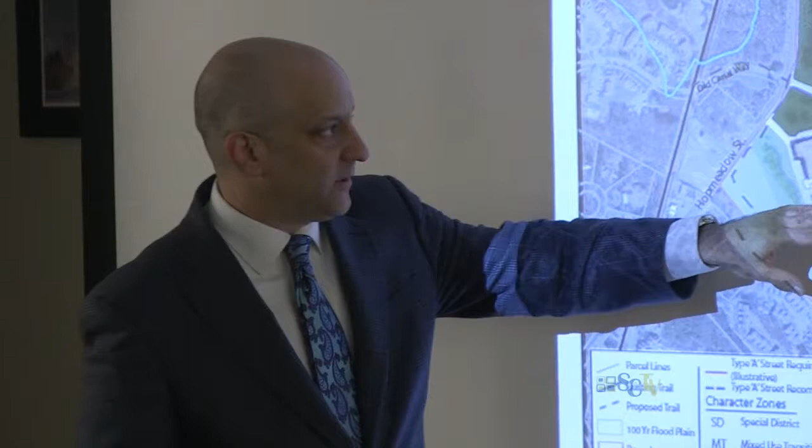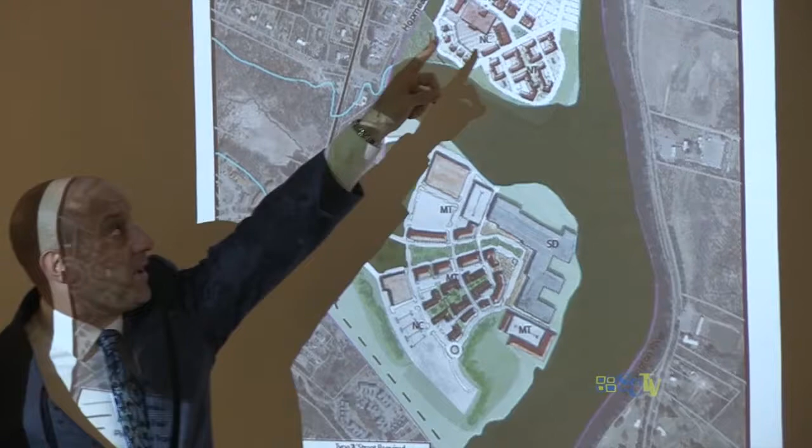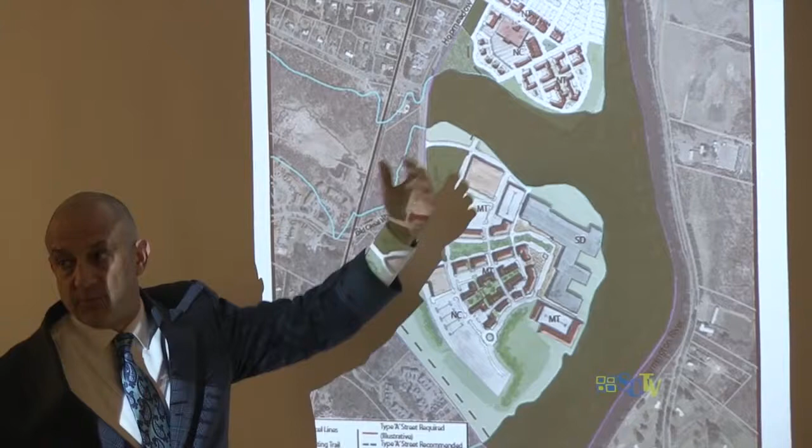Whether we're talking about infill development within the parking area around the office building, as we discussed, there could be multiple different things in terms of some specialized retail and maybe some residential, and maybe, for example, on the 40 acres, a retirement or continuing life cycle care environment, assisted living, retirement, market rate housing - let's say a 30 or 40,000 square foot specialty retail store with some specialty retail and restaurants where you actually have a neighborhood that could support and complement the reuse of this building. Well, this concept is based on several things that we considered in terms of a likely outcome.

So whether a purchaser likes what we've already done in the charrette, the odds of that are probably not going to be exactly aligned, but hopefully it's influential because we've done real market analysis. We've received great feedback from the development community in the area, and frankly, we have community buy-in to the point that the vision that's emerged makes sense.

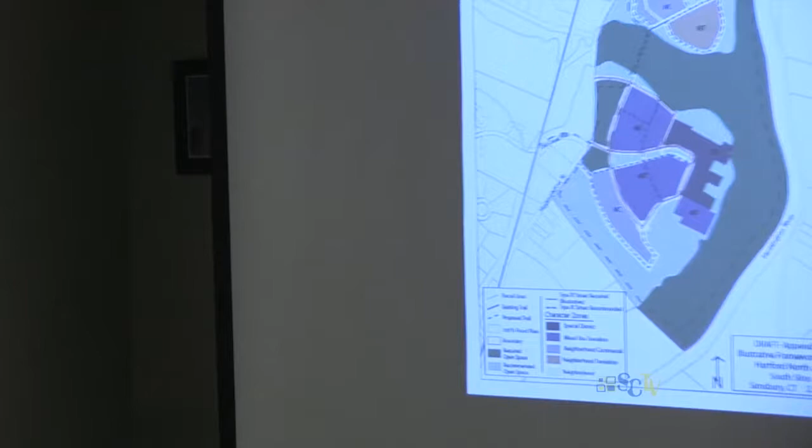In the next step, we would then ask the applicant to put together a master site development plan, and in order to do that, you would have to create a framework plan. So what we're recommending is that we attach to the code for adoption by the zoning board, the zoning commission, illustrative framework plans.

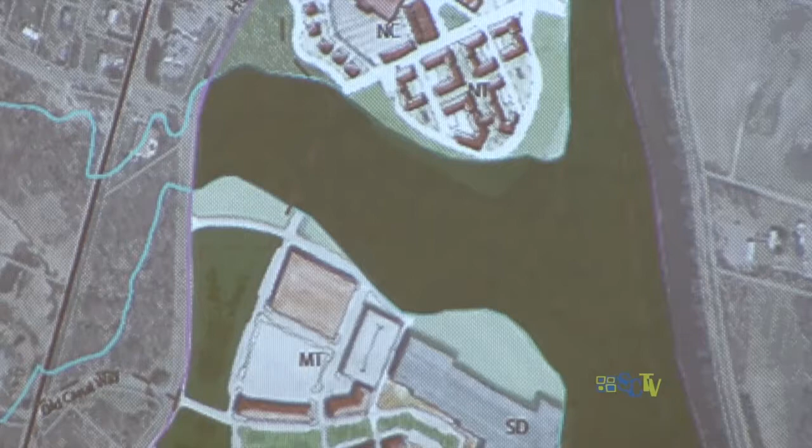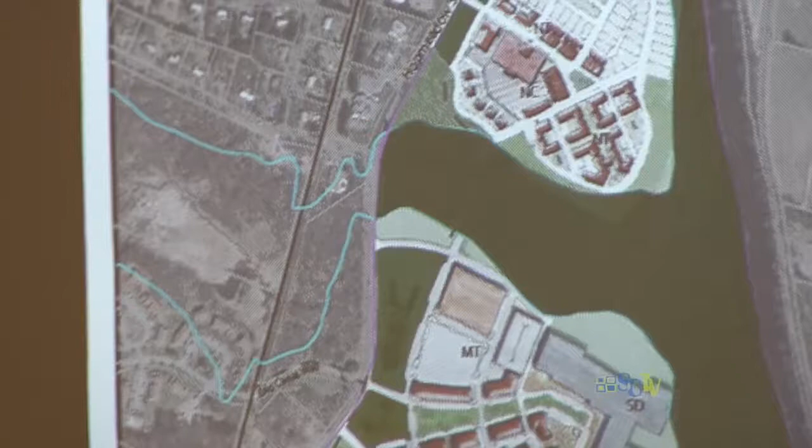But we don't actually establish the framework plan, because it's too presumptuous for us to establish a street network, the various character zones that reflect a specific concept. We want to give guidance so that when you come in with your idea of what the development should be, both for adaptive reuse and a different utilization of the parking and some greenfield development on the 40 acres, you have to look at the code itself and make a decision on what you think the framework plan should be, and then ultimately the detail and the master site development plan, which would represent the aggregation of the design tools within the code.

So it is a form-based code where we are actually looking at how the buildings relate to each other, how the design of the public frontages of the streets relates to the private frontages of buildings down the streets.

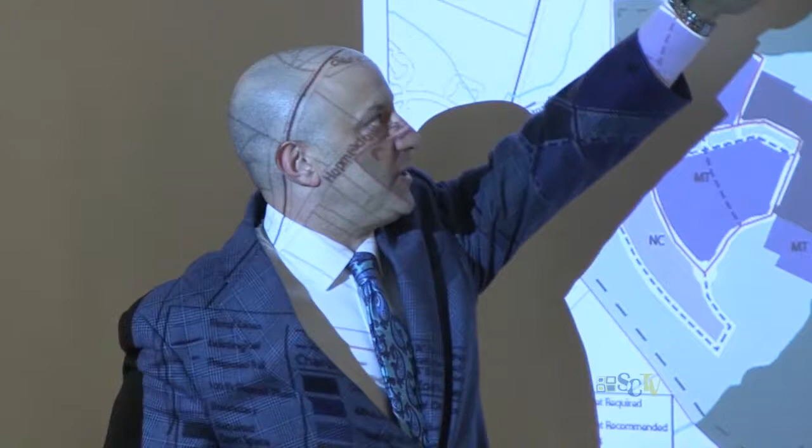But we're allowing that with a wide variety of uses. Now, the uses on the office property are going to be still more tilted towards industrial plus mixed-use residential office retail. The uses we worked through in our market analysis and the community process over here, of course, would not be industrial.

They'd be more community-based office retail residential. So I just wanted to reinforce that what we're doing is setting up the requirement for the applicant to come in and establish a framework, but these are illustrative. We are not actually coming up with our own framework, unlike what you did for the town center.

Because in the town center, you already have established patterns, historical development patterns. You have multiple owners. So the point of the town center process was to get the owners together and agree on how they relate to each other.

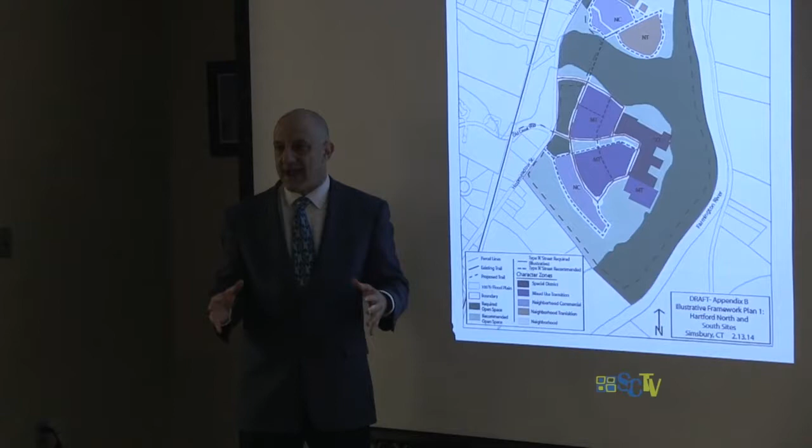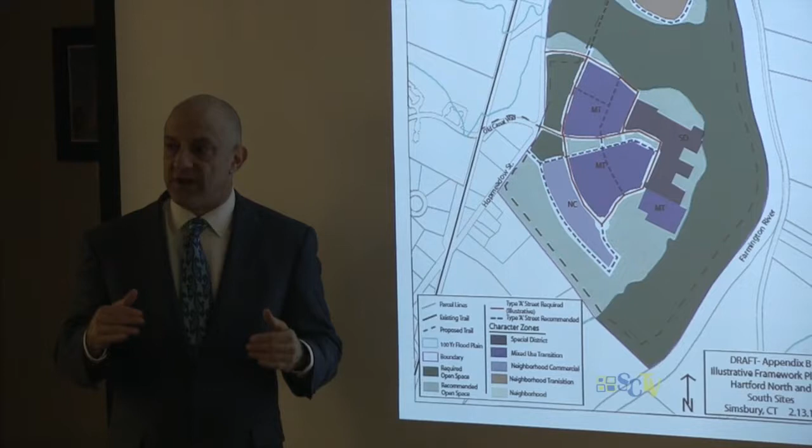But this project probably will have 3 or 4 specialized vertical developers under the umbrella of a master developer. And until we have that table set with participants who understand both what they think the market will bear and what they think the community vision needs to be, and frankly what they need to generate in terms of yield long-term in terms of rents and sales per square foot to back into a sales price, then I think we would be cutting off early some creative opportunities down the line.

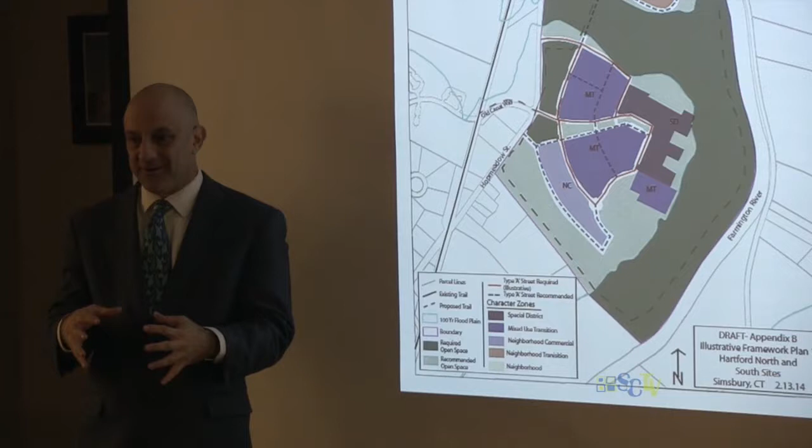So that's the balance. There's a lot of prescription in the design tools in the document, but we're not putting them together. We're asking the applicant, the purchaser, the developer to do that. And I think that's very unique.

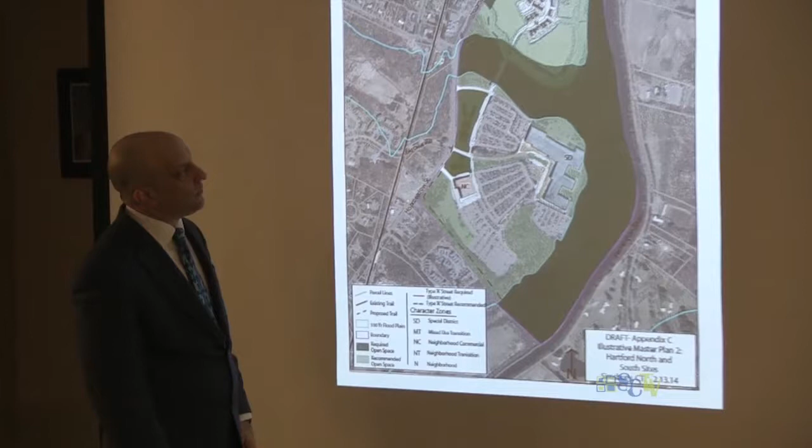So here's another one of the other illustrative plans where we had more of a conservation design, with a lower impact on the 40 acres with some potential farmland preservation, and a fundamental adaptive reuse of the property, maybe a multi-tenant use. We talked about some interesting light industrial strategies within the building, preserving the data center and maybe having a local brewery facility. There were a lot of different options.

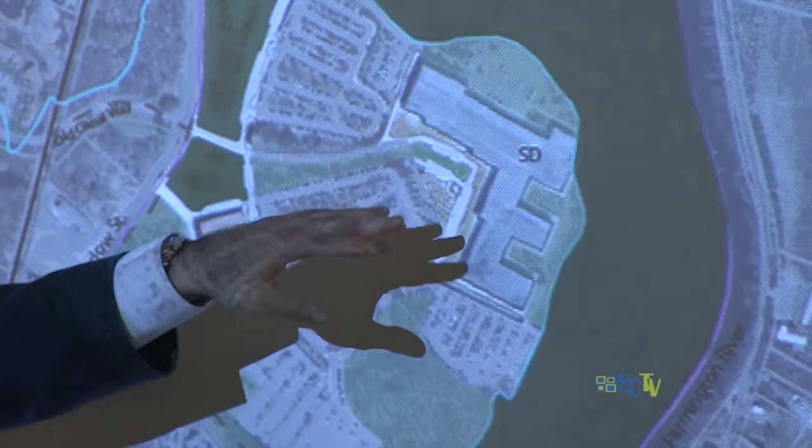I think, John, you're still kind of getting feedback that the single tenant strategy is going to be tough. So the other thing we've done in structuring this ordinance is making it easy to break the building up into multiple tenants, or if it made sense, to use less than the entire building. And I know there are certain components that would still have to be kept in place in terms of the physical plant, but maybe one wing of the building is no longer needed and part of the building is demised.

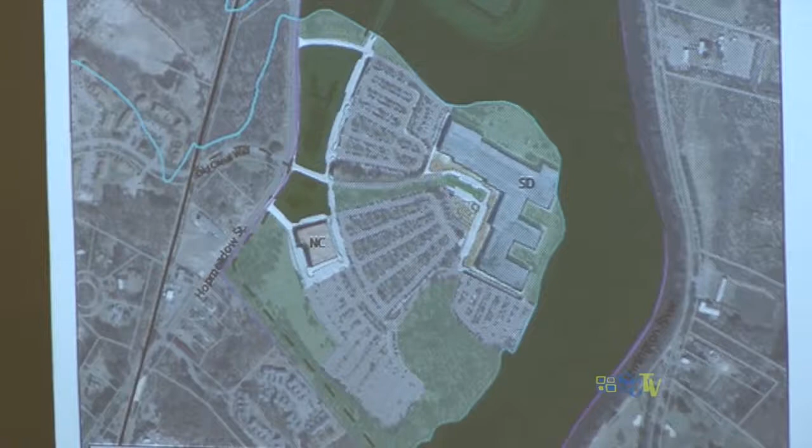The point is we won't know that, and the tool we've reflected in the document, I think, creates maximum flexibility to do that, but still represents a strong vision of what should be done with the site.

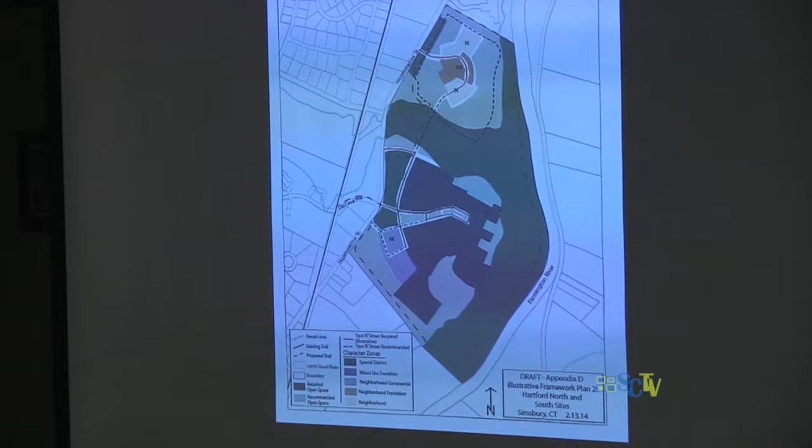Here's an illustrative example of another framework plan that would set up the final master site development plan required in detail in the document, in terms of parking and how the uses relate. We did not do an illustrative master site development plan because that's taking the document all the way through its entire required steps of putting all the tools together.

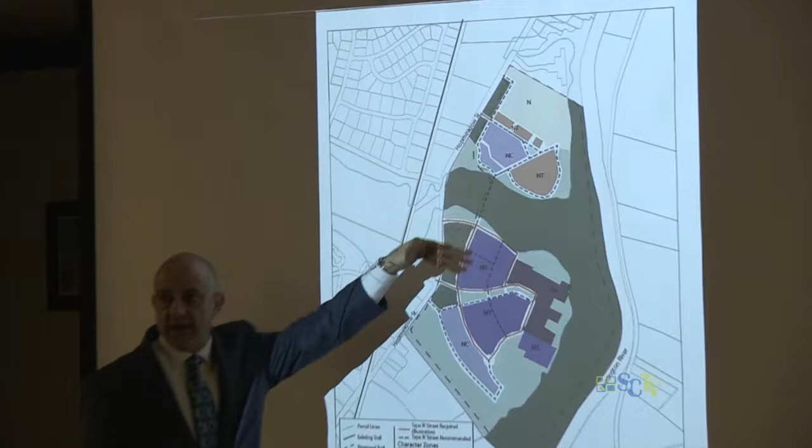Frankly, that's unnecessary. But we wanted to give enough guidance that anybody who purchases the property and uses the tool would have to go through a conceptual planning process, develop the framework, understanding the impacts on Hopmeadow, the connections, the watershed, the relationships back to the wetlands, whether or not you'd want a pedestrian connection.

And all those sensitive constraints that have to be respected and are required. In doing this, we worked very closely, and Jay, you and Hiram went back and forth a lot, and I think it was well worth it to understand how we could set up a unique process to incorporate the required and traditional steps and the boards and commissions, but not engage those boards and commissions in a way that was unnecessary. So they developed a process, and hopefully you all picked one of these up.

If not, we can hand one out. Jay, you might have some more general comments if I've missed something important for the overall role of the code. But what we wanted to do is have Jay walk you through the general construct of the process, where you've got basically four different avenues you can go down in terms of the types of applications.

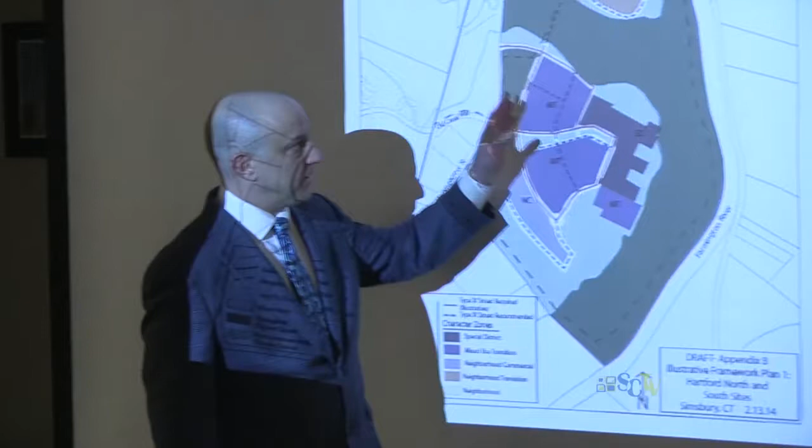All the way from just a simple adaptive reuse to a complete reinvention of both one or both of the sites. And that implicates different steps, but we fundamentally tried to maintain as much staff discretion within the framework. And the reason we're doing that is predictability.

Again, this is a single owner that wants to be able to go out to the marketplace and create very clear expectations, so that if somebody were to take this seriously, they were to enter into a contract for sale and go through the due diligence process, depending on what they think the potential is, one or a number of scenarios.

They could look at this document and anticipate exactly what it would take to go from purchase to development in terms of the cost, the process, and to the extent they wanted to deviate significantly from what this reflects, they would understand the consequences of that.

And so this process that we've developed with Hiram, I think—and we were with staff earlier today, key staff in addition to Hiram—we got some really good feedback. One of the things we added was probably some sort of early referral to the Conservation Commission for just advisory input, regardless of the type of application.

And then later on, the Conservation Commission would come back in if there was a significant impact in terms of wetlands or some of the other sensitivities on the site. But I thought that was—Howard made that recommendation—because this is a really highly regarded location, high profile, visible, and felt like some early input that's advisory only from the Conservation Commission would make sense.

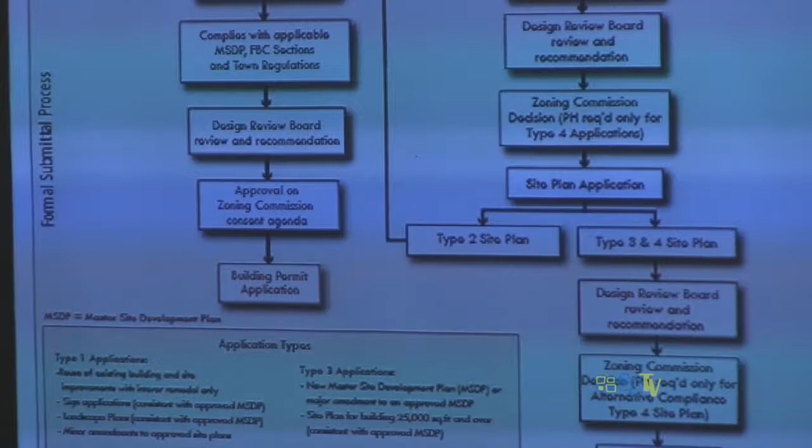Jay, you've been living it more than anybody, so if you have some detailed questions, let Hiram know and we can get those answered. Another way I would put it is like you have some jigsaw pieces of the puzzle, and you can put the puzzle together in different ways. There's no right answer or wrong answer. It really just depends on what the vision of the developer is, and to make sure that it's consistent with the town's vision, we have an overall set of parameters where there is some rhyme and reason for the jigsaw puzzle, that it can't all be willy-nilly, but it still has to meet the overall town vision, while you still have flexibility to adjust those pieces as the market evolves.

One of the things we wanted to make sure with the process is that we really don't know what the ultimate positioning of the existing building, the existing parking lot, the greenfield sites are—different kind of issues with different parts of the site—so we want to make sure the application process can address that. So we actually had to establish 4 different types of application, from the most easy to the most complex.

Type 1 would be you're not doing anything to the building on the exterior, you're just reusing the existing building, taking another tenant and putting it in, so you're not even making any exterior changes. That's the simplest process, where it's basically a staff review and approval to make sure it's consistent with what was originally approved. So that makes it easy to get somebody in the door as soon as possible.

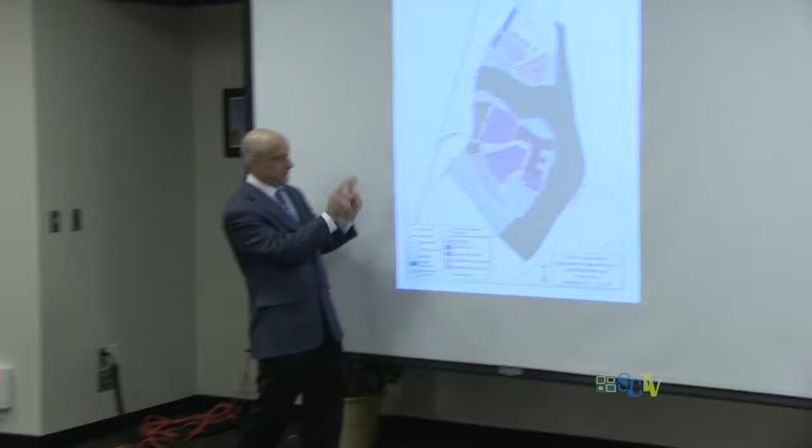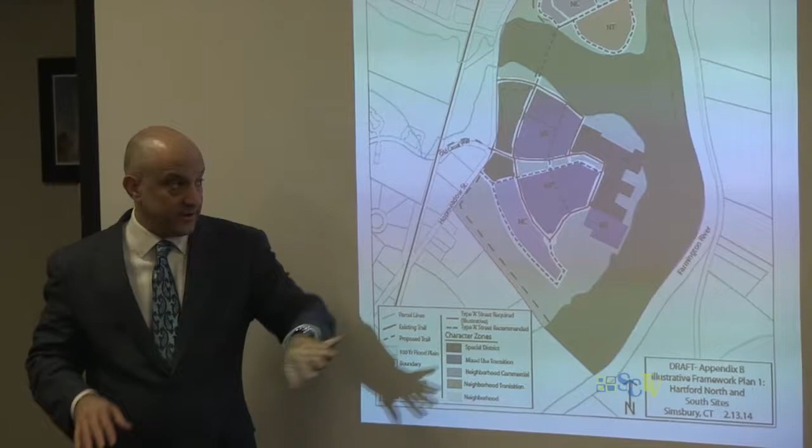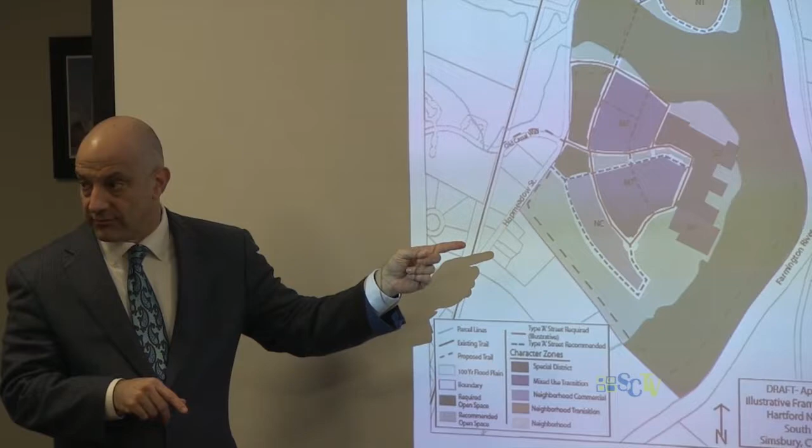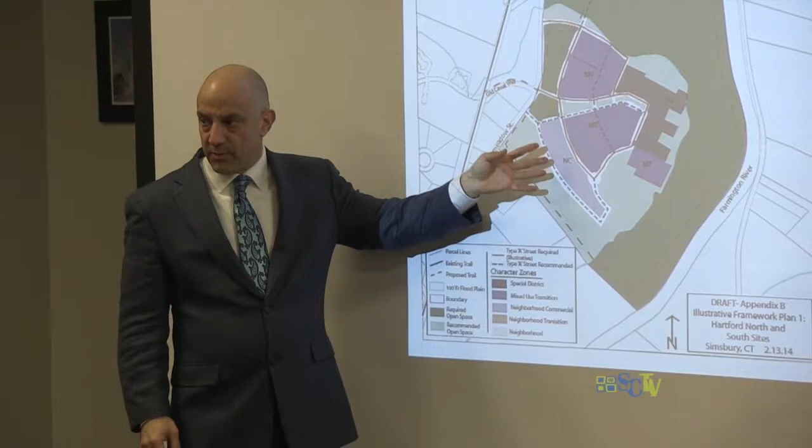I'm glad you asked the question—this is illustrative, not regulatory. The applicant will have to develop this framework plan as part of their application, if they're doing redevelopment other than just adaptive reuse of the building or some partial aesthetic improvements. They will actually have to create one of these themselves, and that becomes the template for their detailed master site development plan, which will specify what uses, where the roads are in detail, where the parking is, what street types, what building types, what heights, and all of that. This is just one layer of what's required. We felt like we needed to put in a couple examples of what the framework plan should look like, but this is strictly an illustrative example of what they have to prepare.

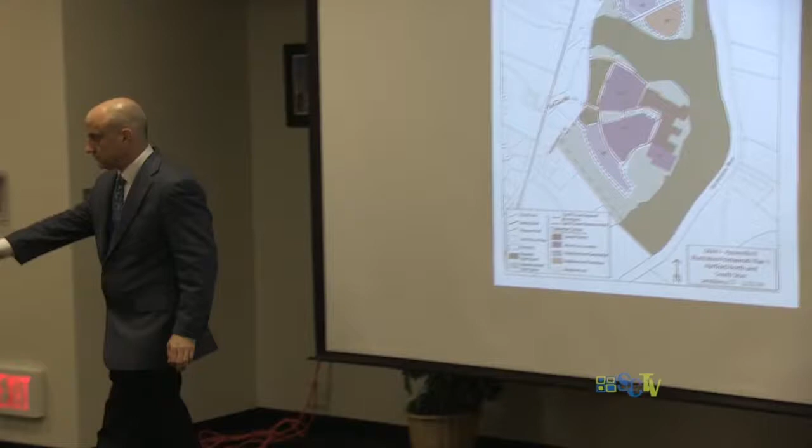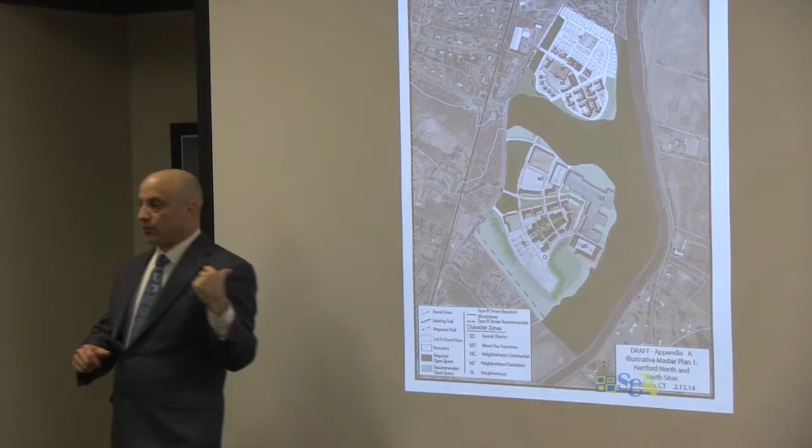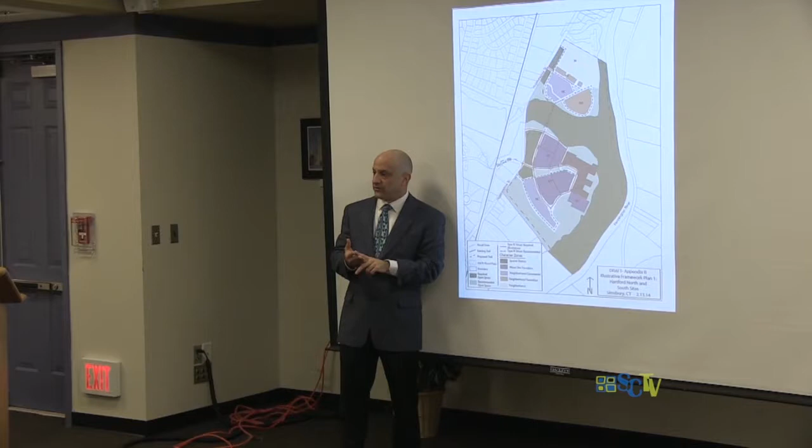Along the same lines, it seems you've stuck to the existing footprint of pavement and building footprints—is that by design? This is the illustrative master plan we developed at the charrette. So all we're doing is saying, okay, if this was your illustrative master plan, this is what the framework plan would have to become. And then this would set the stage for the detailed master site development plan that is required, which brings together the specific design tools—the pieces of the puzzle established in the code itself.

One other clarification: residential uses are permitted here, but not single family detached—you can do townhomes, you can do apartments. So residential uses are pretty much permitted in all the zones. Yes, they are—we're adding a lot of uses down here that are not currently under the industrial entitlement, so this is very additive to the current entitlement.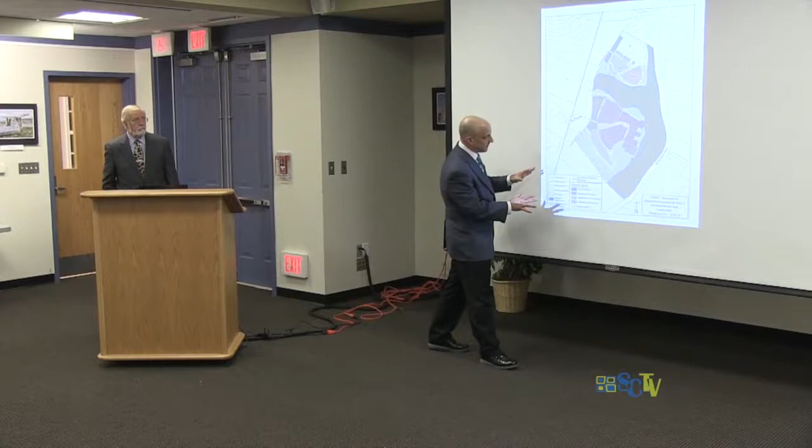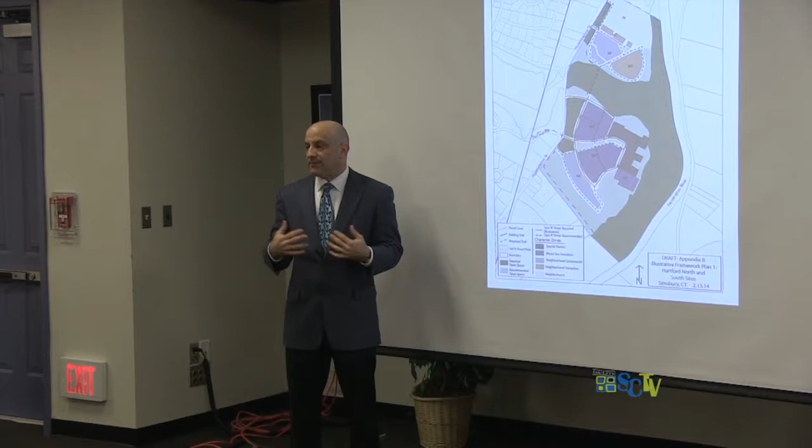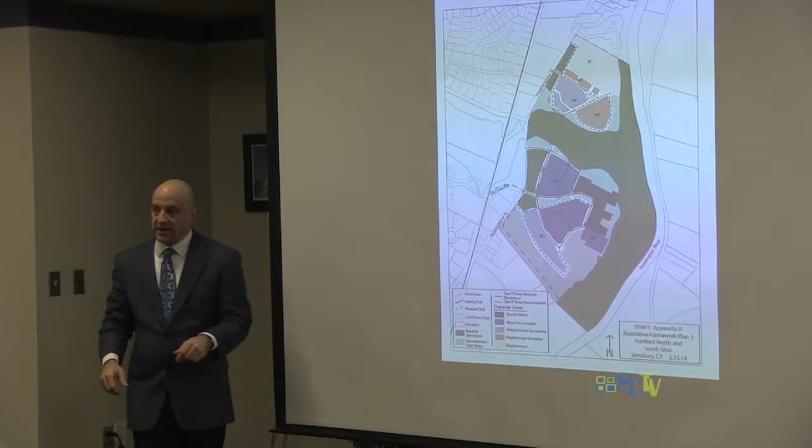There's a question about the existing entitlement versus this. Our intention in working with Hiram was to use this to replace the current entitlement, because it takes what's already in place and adds to it. Our recommendation is to just do a complete rezoning so there's no confusion as to which would control, because I don't think we're taking anything away—in fact, just the opposite. We're taking what's there in terms of use and adding to it, creating a lot more flexibility in how those pieces could be put together.

Third question: about that sensitive area, the dark green area—there's also a suggestion of, I'm not sure if it's a road or a trail there. Have you looked into what could go there to make some connections? We actually worked with staff, conceptually with the DOT, because they would like a road there—they want some parallel capacity. So the question is, what does that mean?

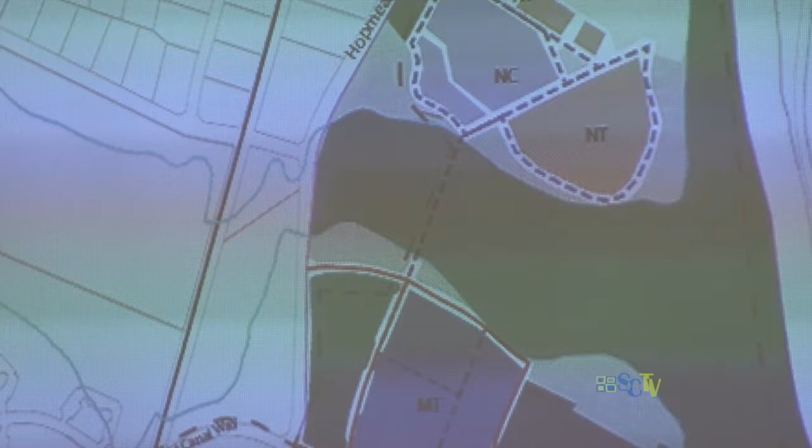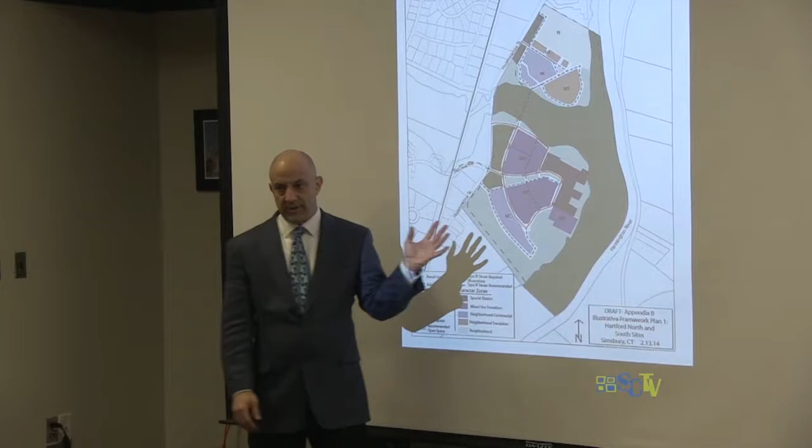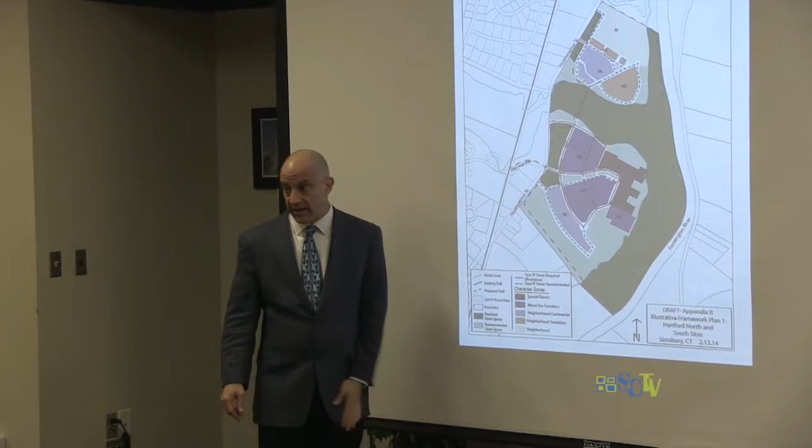Our recommendation is that there should be some pedestrian connectivity, since getting that constructed and permitted is pretty basic. If the purchaser and applicant come in and want to develop uses permitted under the proposed entitlement reflected in the code, that may not be allowed under the current permitted number of daily trips the Hartford had to secure for this facility—though what's permitted right now is a lot of trips. But let's just say there's going to be some additional mixed use of significance.

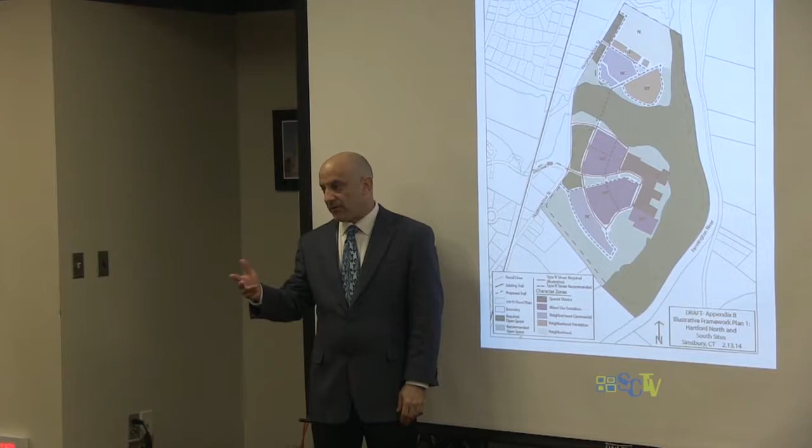You know, that cuts both ways. Jay was mentioning this earlier. Mixed use tends to spread the time of day impacts out for most of the day, but you're still going to have a lot more people living here and coming and shopping. So there might be a desire to actually make a roadway connection here so you can get internal trip capture instead of people driving out and back around, which the DOT would love to avoid.

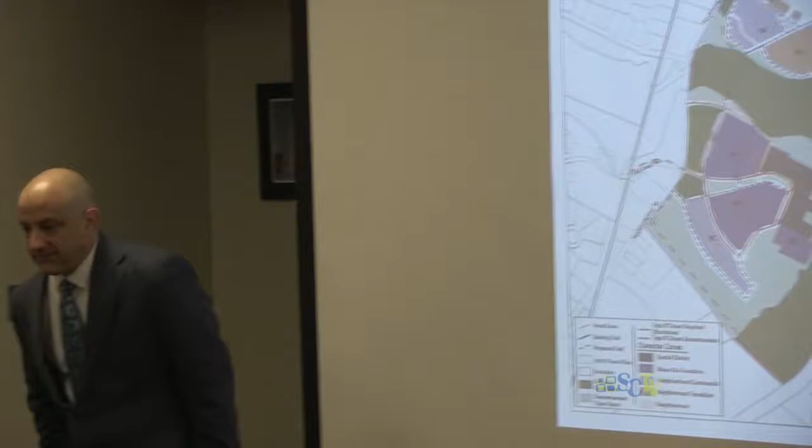But that's a whole different ballgame going across the wetlands here, and the disturbance would be absolutely very significant to actually construct it, just that alone. So according to Howard, the town staff, you'd have to for sure get an Army Corps permit to do that, and that's a big deal.

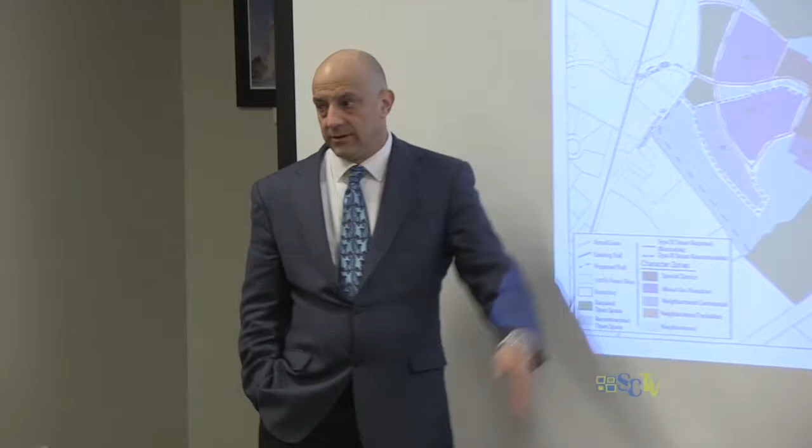It may be worth it, but we're not suggesting that should be done necessarily to move it forward. The entitlement, I think, reflects it's pretty aligned with what's already allowed. But that would have to be something a purchaser would go through and determine whether it's worth going through that process, because they'll be required to be incredibly sensitive in their design, construction, and impact. But at the end of the day, if there's a roadway put through here and it's done correctly, it would be good for everybody.

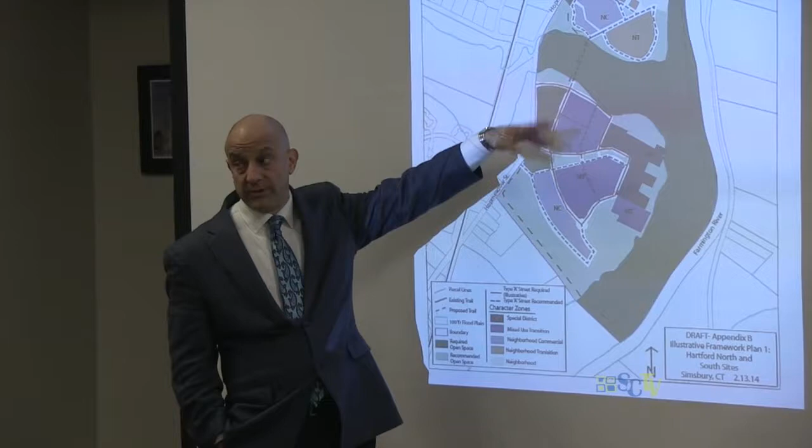My guess is that would be a later phase of development, as opposed to conditioning the first phase of development on that, because you'd have to take a significant amount of time to get the permit.

One of the things I had thought about, Kevin, is that an outstanding design for a suspension bridge in an area like that, which is extremely sensitive, could be done. Now, that wouldn't necessarily be cheap, but it would be an outstanding architectural feature that might set that whole place apart, and might still be less intrusive into the wetlands and floodplain area than a regular roadway would be. So I think there are a lot of possibilities here, and that shows one of those possibilities.

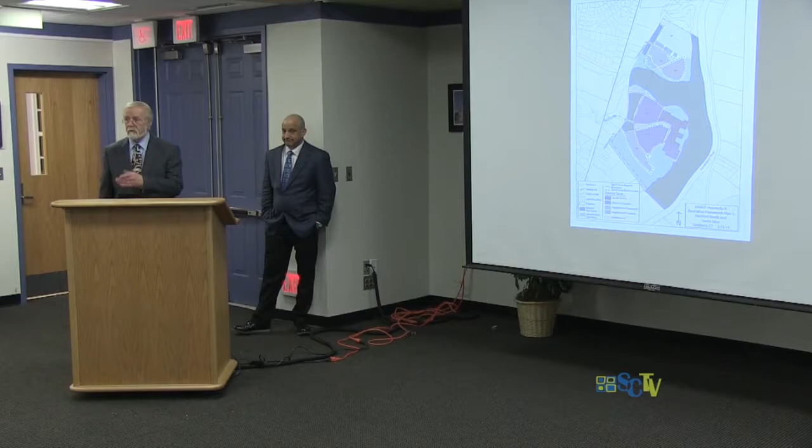How many feet, can I ask, is that dotted line? Is that 300 feet, 500 feet? It's the existing floodplain. If you go back to the illustrative, there's a scale there. It's got to be pretty long. Well, let's see, it's at least 300-400 feet. How long is the building here, approximately? I bet it's more than that. I bet it's 500, yeah.

Can you give me an example of the difference between a Type 3 application and a Type 4 application? For example, if they want to create new component zones that don't fit into the pre-set component zones—we have like 5 or 6 defined—but they want to create a different component zone that's totally unique, then they come forward with a Type 4 application, where they set different standards for pretty much everything. It's really like a complete rezoning, almost like creating their own PUD zone.

So a Type 3 application would by and large comply with the general descriptions here, as long as there's at least one building over 25,000 square feet, which differentiates it from a Type 2. The difference with respect to building size is basically: you have the master site development plan, and then you have to do a site plan that gets approved by the zoning commission. If the site plan is for a building less than 25,000 square feet, it's basically approved by consent agenda by the zoning commission, whereas if it's over 25,000 square feet, it goes through a regular agenda. So that's the only difference. But the master site development plan has to go through the zoning commission no matter what—yeah, it's a Type 3 application regardless.

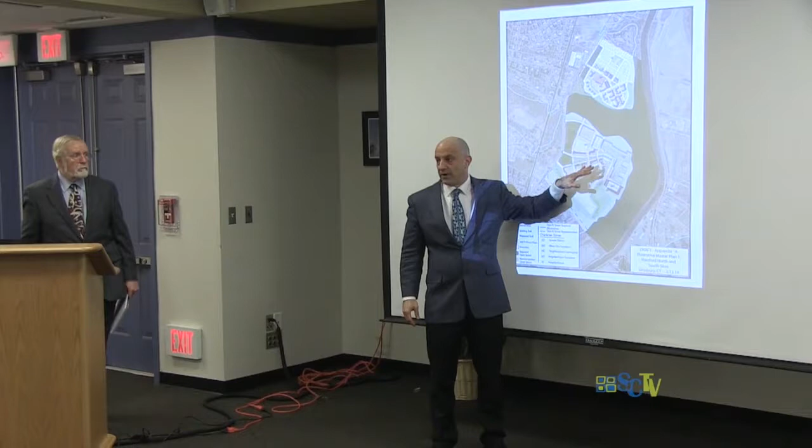If I could respond, I think the good news is that everybody's on the same page with you. This illustrative plan assumes that this building could be used for that. The code that we proposed assumes and affirmatively allows the entitlement for that. And I think actually that would be the best outcome if that was the primary use for the building and you also had the mixed use complementing it.

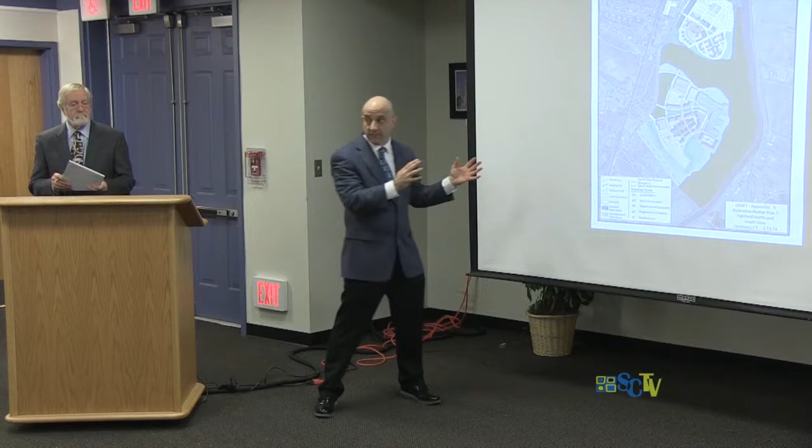Because this is a regulatory document, we've got to be careful about aspirational comments. However, the work that we did in the charrette reflects and is consistent with what you've said. And I think it's going to be very clear when the comprehensive marketing is put together, once we've completed the city side work, that CBRE is going to probably really emphasize that point. There's no question in my mind that will be held out as a very good opportunity. I think everybody's in agreement with you.

My notion is that the building would just come down, and I hope CBRE has the magic wand, but it's hard for me to imagine how the building's going to be repurposed, frankly.

We took a tour of the building, it has all of the elements that you would need for manufacturing. It's got sufficient power, sufficient internal physical plant, loading bays, and the free span areas are very, very significant. My guess is that before its demise, anybody purchasing it for manufacturing would take a strong look at it and see if it could be reused on an adaptive basis. There's no doubt in my mind.

Now, we're not structural engineers or architects, but we did have one of our members who's an architect, and we had several other folks with us from the community. Tom, am I off base by saying that I think there's some potential for that building to be used for light manufacturing today with some retrofit?

I don't really have the expertise to comment on that, but all of the statements you made about the building are true in terms of its capabilities. It would have to be ultimately costed out, but I do know that it's a very significant asset to just demise it at this point.

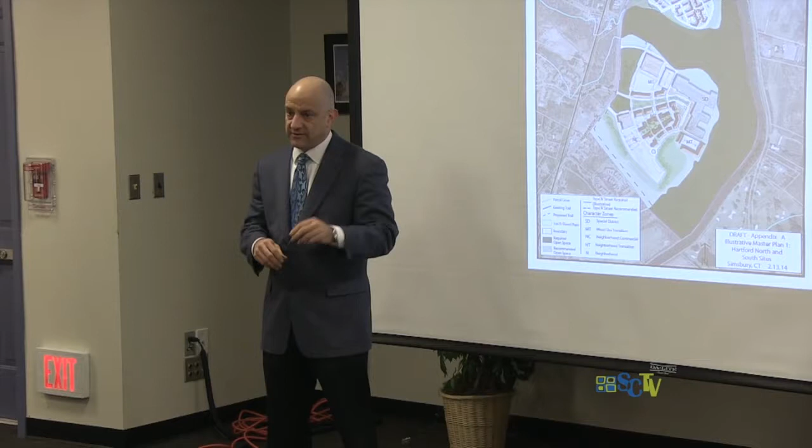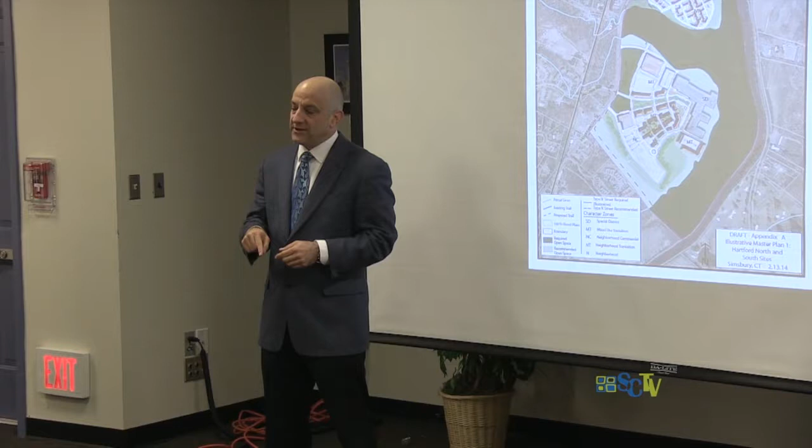We're working in Northwest Arkansas. We've just been hired by Rogers, Arkansas to do a redevelopment plan, which is next to Bentonville. In Northwest Arkansas, their challenge is not jobs. Their challenge is actually attracting the 25 to 40-year-olds to take the jobs that the major corporate employers need to fill. They're focused now on delivering mixed-use walkable neighborhoods because they have to compete against Seattle, against Europe, against markets where 25 to 40-year-olds can work anywhere they want.

The days of corporate relocation being based on the cheapest land and the biggest incentives are over. Now it happens where you can provide a great work environment, where people who work there can actually live nearby and not have to drive for lunch - that's a big deal. And you have folks who appreciate the natural amenities of this site. I don't know of any other place in New England with this large an area for development that brings all those factors together.

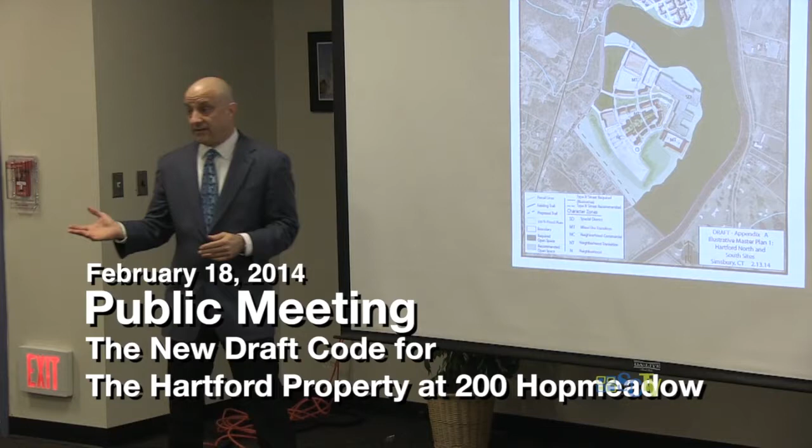So to the extent there's a residential component that's part of this, it's been very carefully considered, and we tested that in the community process. A lot of the feedback, though not scientific since people self-selected to participate, was very supportive that if there were a location for a variety of residential types embedded, including multifamily and a range of multifamily types, this was a really good location.

I think that's consistent with your statement that development encouraged and supported by the town should have a net positive impact on the tax base and not be a drain on it. In practice, will that necessarily play out? I think the calibration of the ordinance and the market analysis we've done, working with stakeholders, especially professionals in the marketplace, indicates it's more likely than not that will be the case.

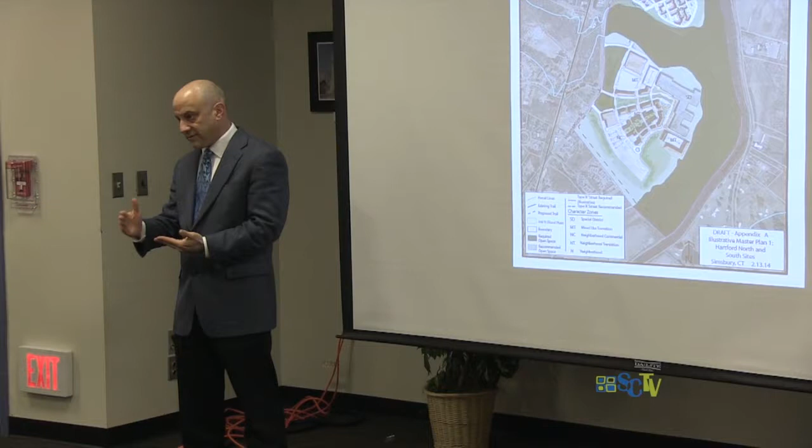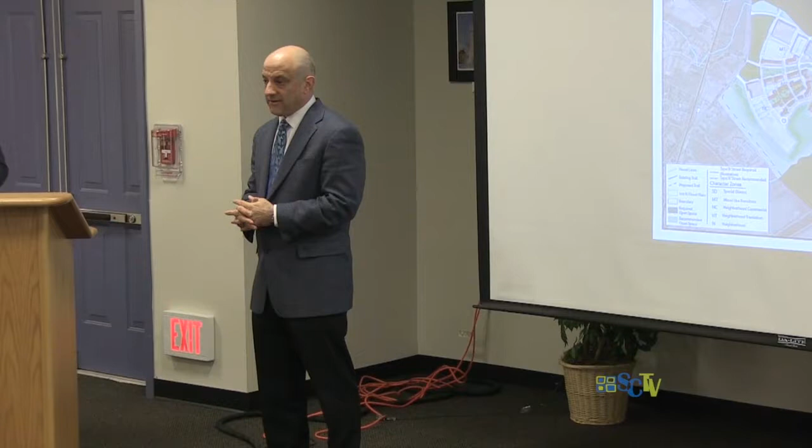I think I'm going into dangerous waters to suggest this code should have a requirement for establishing a threshold of concurrency. I don't know under Connecticut law whether that would even be possible. I know in a lot of other states it's not, but you certainly have the right to consider it as a policy question before you approve zoning generally. I don't know specifically if that concurrency requirement can even be applied to a specific zoning case under state authority.

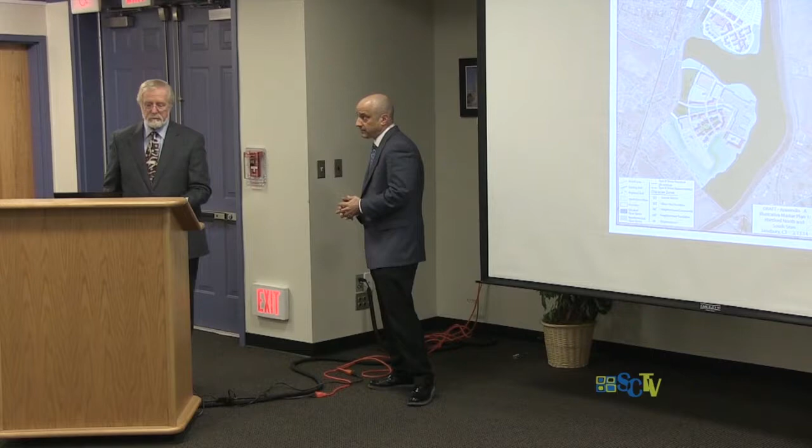Certainly not being the town attorney, I wouldn't want to go there either, but the Planning Commission, in its deliberations regarding the plan of conservation and development, could talk about things like that if they want to. But I'd back up a couple of things that Scott said - there was a lot of thought put into what the mixes would be and what their potential impacts would be, obviously looking at positive economic impacts, which is what this is all about.

Frankly, if no plan or regulation is put forward that makes sense economically to Hartford, then this plan would never happen - the building might disappear, and it might be two cornfields instead of one cornfield.

I think the economic reality has to be part of this as well. But everyone's aware currently that trying to make this a net positive is important.

Another important thing Mr. Duguay mentioned was screening the uses from the road. As you can see, those large green bands adjacent to the highway are there, and they're not there by mistake. Retaining that potential screening, which has been there for years, to house a building six times larger than the big boxes we already talked about - those green spaces are going to stay. They're certainly going to propose to stay, and that's what we hope, to continue to buffer these things from traffic.

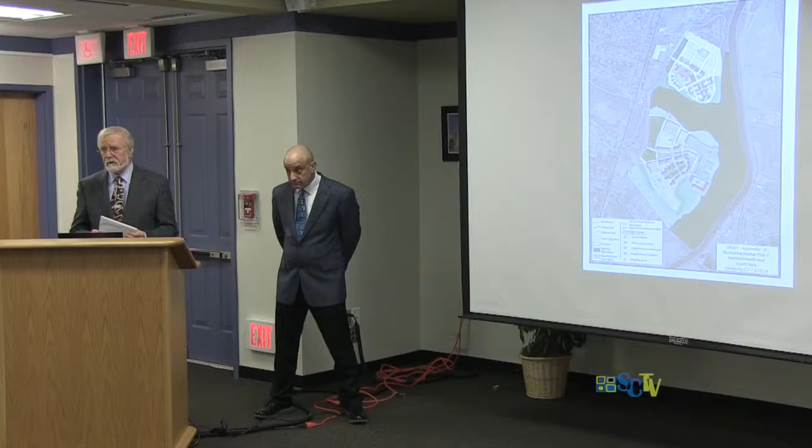Basically, the way we've written it, because it depends on where the building is proposed, at what elevation and height, it's not possible to come up with a single standard. They would have to come up with a recommendation for where they'd put the four-story buildings and do an analysis from Highway 10 as to what views are blocked based on that. So it's subject to an analysis of the views of the ridge and the tower from Highway 10.

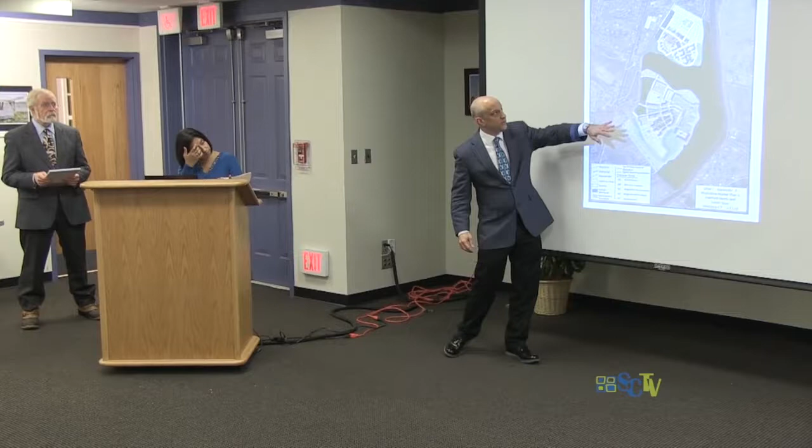Well, I'm not asking for regulation, I just wondered if part of the master plan - it was absolutely considered, yes. The height limitations, the contours, the setback from Hopmeadow - basically you'd have to test every location to say it with certainty, but it would be very difficult to block views under the current standards.

That's not really what I'm asking. What I'm asking is, if somebody has an idea and wants to build a building, is it part of the master plan that if I build this building, this is what you'll see from Route 10? I'm not asking for regulation, I just would like it understood what impact that would have. The regulation says they have to show that. Oh, okay, I apologize.

I think it's interesting too that the green space along the northern piece - a couple years ago the Planning Commission approved that subdivision for that property, and that green space is exactly what the Planning Commission was talking about at the time, to move development back from Hopmeadow so those views would not be blocked. So that was taken into account very clearly.

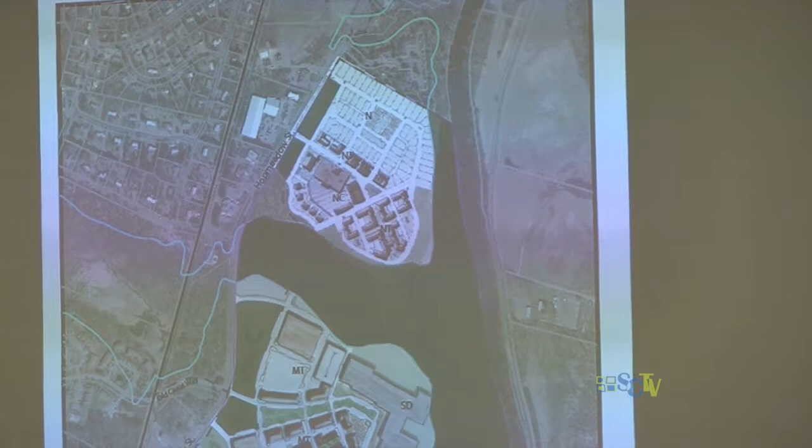But still, if you drop everything back 100 feet, depending on how much you want to see, you can't build something very tall back 100 feet and still see the mountain. That's right, and that's why it can't be very tall at all - more than 20, 25 feet. Well, but the Hartford building itself is 4 stories in some places. So the screening and topography are all - but it's much more important than 100 feet off the road. No question, but I think the topography has to be shown, and the way things are set back has to be shown.

The other thing that's always fascinated me is that people want really good architecture - the Design Review Board tells people we want really good architecture, but we'd like you not to see it. So we're working on that blend now, that's all I'm saying. We're trying to.

Another question I had - I understand the need for streamlining and predictability, but there's an awful lot of authority that goes to the town staff. Is there any recourse for appeal of those decisions or review of those decisions?

Well, there's two things I would back up and take a careful look at. The type 1 application is really a simple application - that's the only one that's really straightforward. Anything else can go to the commission, even if it goes as a consent item. If one person on the commission says, wait a second, we'd like to discuss this, then it gets full discussion. So all the decisions that can be made by town staff function like a consent agenda - it still goes to the commission, and ultimately they decide. Interior renovations, for example, don't go to commissions now, so simple things like that - that's really what a type 1 application is.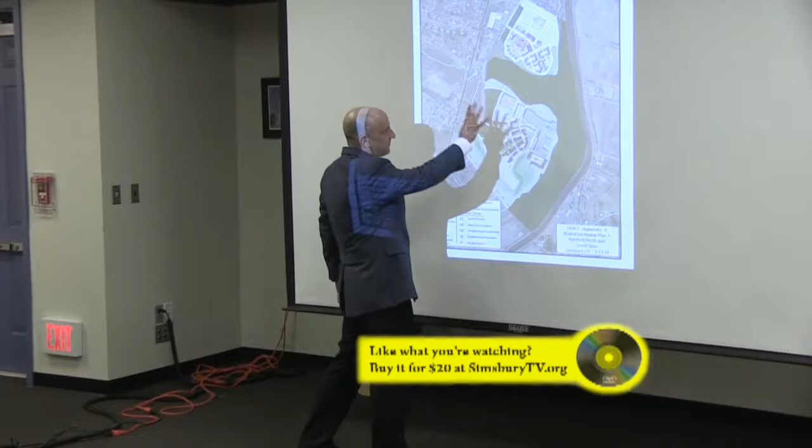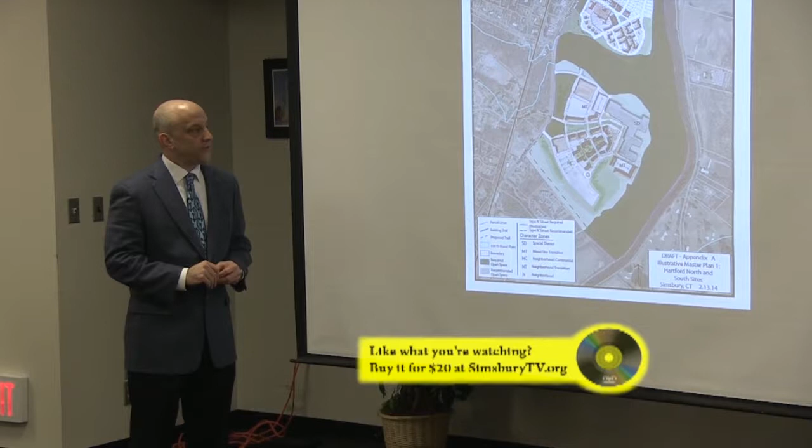One, you already have a lot of protected space here, because it's next to the river, and because there's wetlands. But almost no other site in town is constrained by the fact that the price of entry is tens of millions of dollars to fill up this building.

I'm not saying the town should give up on its vision and policy of protecting green space, but you're one of the most successful communities in the United States as a percentage of your land that's protected. I think all the factors are so unique here. You already have the Hartford doing an amazing job of low impact design with a huge amount of development.

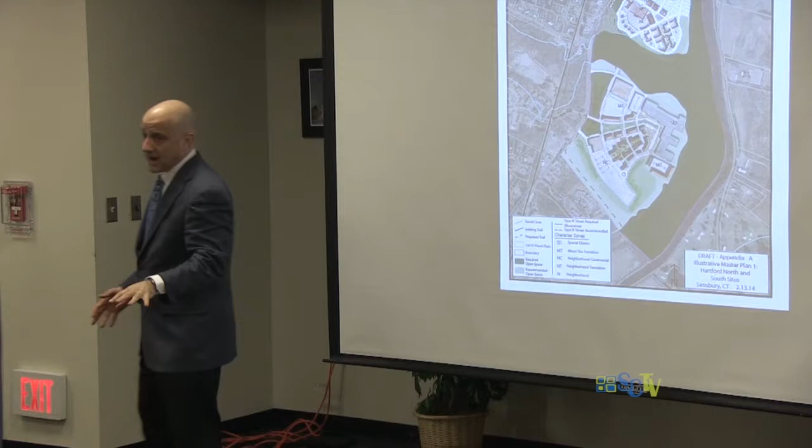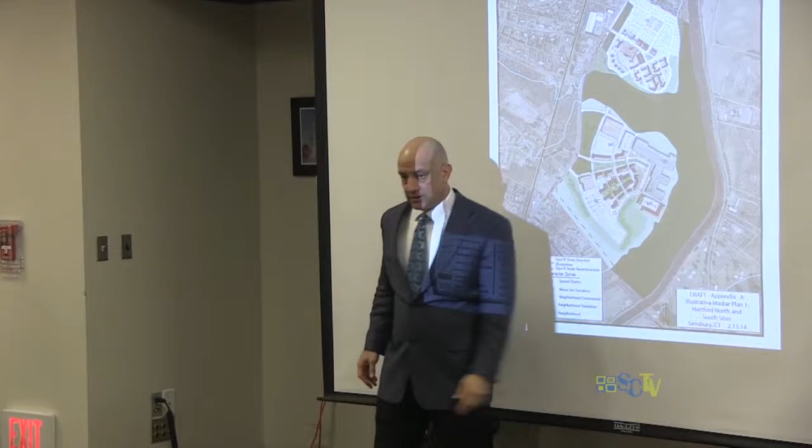I just think the requirements we've put in place to create a walkable mixed-use area with embedded public spaces gives you an urban environment, but one that has natural amenities, and I would rather you measure those for this particular site on a quality basis versus a quantity basis.

If we applied a traditional low-density, semi-suburban or rural standard to this site, I think we'd be ignoring the other factors. So I think it's not just a balance, it's actually a combination of things that will create a really great place. I don't think mathematically you're giving up anything by reducing that requirement for this particular location.

You could argue that different ways, but we've done a lot of thinking about it, and we struggled with it. It wasn't that we just reduced it to help the Hartford move the building. It was because this is one of the few locations where you could create in a greenfield environment the kind of walkability that this town has had from its patterns for centuries, which is rarely accomplished in real estate markets today.

We felt the emphasis on prescribed qualities of street types and embedded smaller public places would be a better trade-off than a mathematical adherence to a certain level applied to other locations. I don't know, Hiram, if you agree with that, but there was a lot of thought that went into that, there's no doubt. I do.

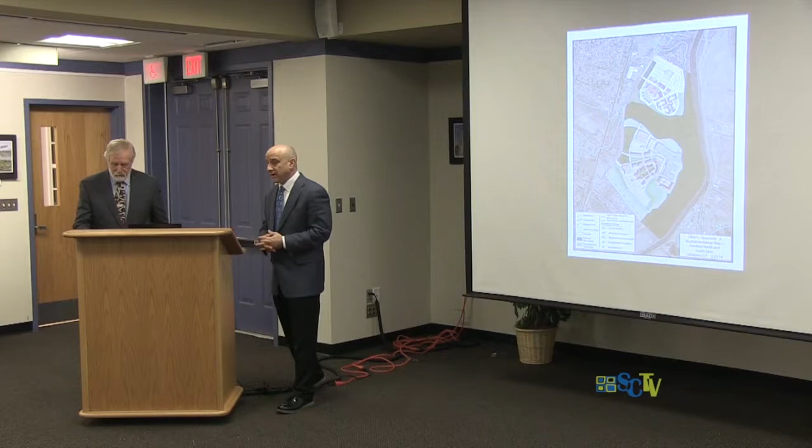I'd just like to add this too, Alan. I think one of the reasons for open space is people historically have not been able to deal with their stormwater very well. One of the things we specifically did was plug into our whole LID study and the fact that low impact stormwater detention and treatment, both in terms of quality and quantity management, has to be part of this process.

So if you can reduce the open space to 10%, but you're still required to deal with all those stormwater requirements as part of this process, then we feel as though we've accomplished what we needed to do and made it more attractive for development.

Plus, as Scott said, it's very important—there's floodplain here, there's wetlands here, there may even be some species on the site we'll be very careful of as well. So the site is well protected, and keep in mind, this regulation is specifically for this site, tailored to it.

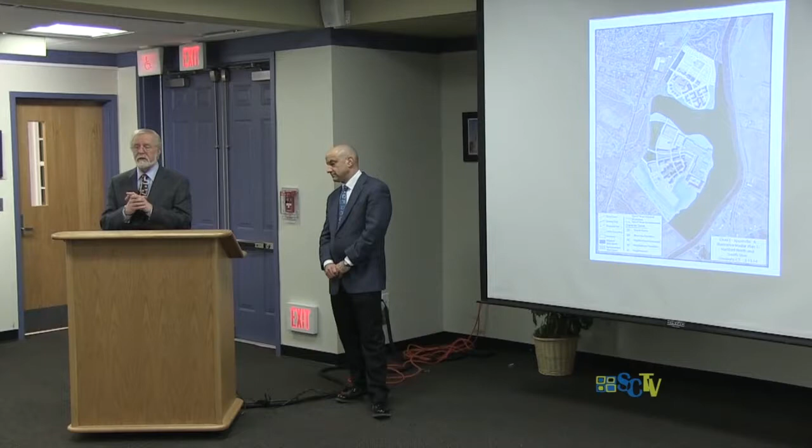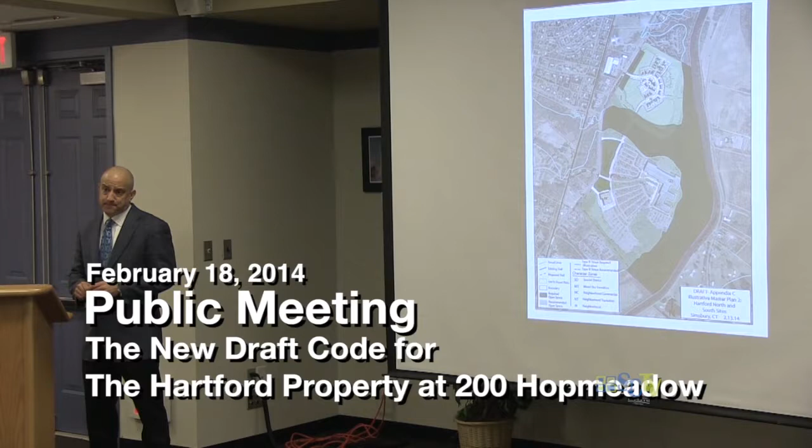So we think, let us know if you think we're wrong, but because of those reasons we're well protected, and it will have to be well engineered to protect those resources. My guess is, because of what Hiram just said, the realities are I don't think somebody's going to get down that low, because they'll have to mitigate and implement those environmental requirements—it's a cost factor too, and at the end of the day it'll be a balance for them. I think there's an internal self-regulation there that we've built in that will encourage good practices.

And I don't think people are going to go to this site and say, let's just pave it over because we can get down to 10%. I think just the opposite. I think in order to be attractive for higher end residential, for retirement, for especially boutique retail—the kind of retail that you all want here, not the kind you don't want—higher end restaurants, I think you're going to have a lot of embedded open space because that's where the market is headed, and that's what's really attractive.

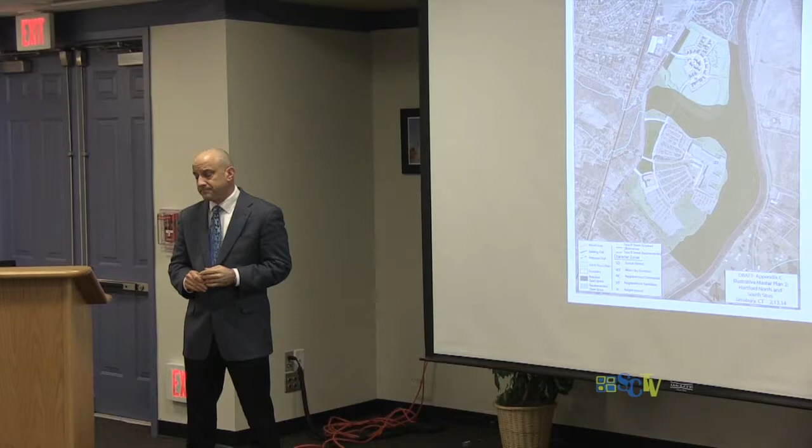Hiram, I don't mean to put you on the spot. In terms of the grand list, what's the, in round numbers, the annual contribution from just the southern parcel? Well, the number is like 1.6, 1.8 million, something like that. So whatever that is, if we don't get this right and see that go down to zero, that's kind of influencing the flexibility we're building into the plan here.

Well, it is. I think the structure—and certainly other folks here know far better than I—is not only worth saving, but there's tremendous potential upside in not having to rebuild it. Just in terms of sustainability, think about the ability to take that building down. Somebody asked today, what if you were to demolish the building? Well, it's next to some sensitive resources. Are there things in the building you have to be very careful of? It's a huge project, obviously, as it was to build it. So we think there are a number of good reasons why it should be kept.

Now, hopefully John McCormick can find somebody from one of his clients who agrees with that. We think the potential for that serving as a nucleus for a really neat development for that area would benefit everybody. But if we were hired by the Hartford to come in and actually do a privately driven zoning tool for this, to reposition it, and there wasn't a question of cost of carry of this asset, we would make almost identical recommendations on the tool that we recommended.

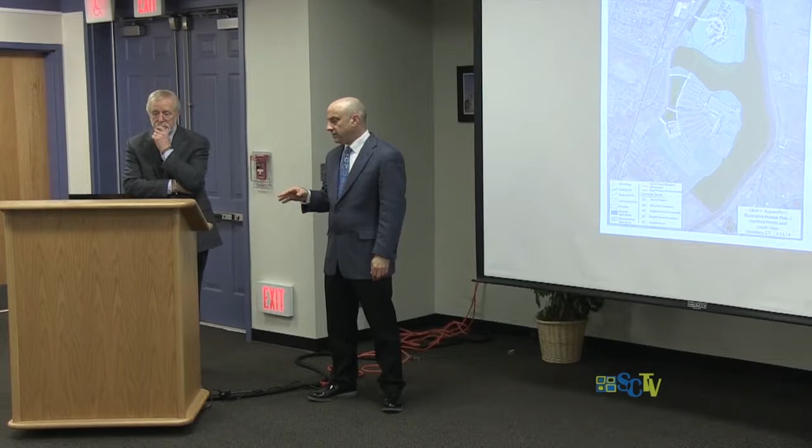I don't want to suggest that the flexibility we're putting in is in any way trying to pay less than appropriate focus on quality requirements. I think the market is going with us.

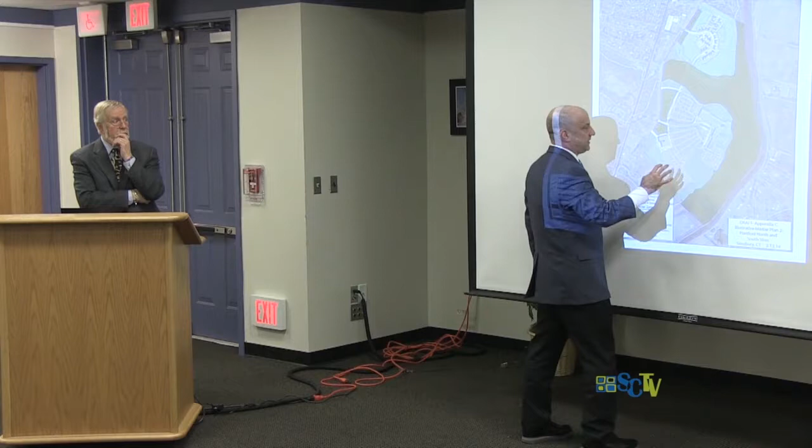Let me say it a different way. If we just went in and said this should be retail, this should be housing, and this can only be more industrial manufacturing, and we applied that, it was very clear what the outcome was going to be—I call that paint by numbers. First of all, I don't think it would sell. Second, I think we would end up running out of time. So I equate flexibility with the ability to attract a higher quality of development, not a lesser quality development. I know that's not necessarily what you were suggesting, but I want to reinforce it, because a lot of times people hear the word flexibility and think, oh, laissez-faire, we get to do whatever we want.

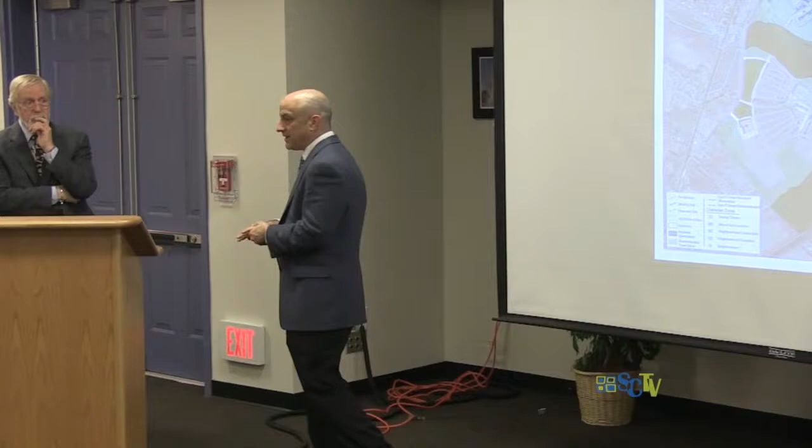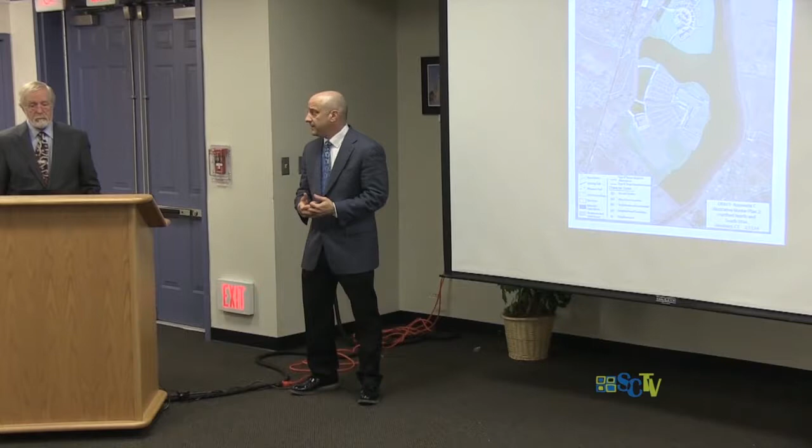The trade-off, the quid pro quo for flexibility, is you really have to step up your game to even think you're going to participate in proposing a development and doing the analysis of achieving the level of rents and returns for specific vertical elements of the development, in order to justify putting a price on the table that the Hartford would even entertain. So I think there is an economic underpinning to this. If it were purely flexibility in that here's the uses you get and here's the amount of development yield you get and you can do whatever you want on the site, that would be wrong. And that's certainly not what the document reflects.